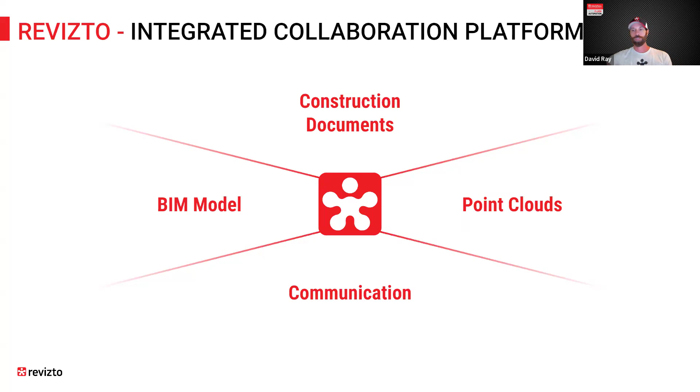And then, yeah, I guess one of my favorite things about Revizto, it does a really awesome job at bringing together the construction documents, the BIM model. If you do need to contend with existing conditions, so scan files and point clouds, it brings all those together. And then the one at the bottom, I think most important, communication. So being able to view the BIM model, view the construction documents, both handles it in a really unique way, and we'll go through that today. But being able to communicate around all of that data, I think is Revizto's strong suit, if you will.

And then some of the workflows that we cater towards, so to the right, design, construction, facilities management, right? And those aren't segregated, right? We kind of bundle those up, and we can have designers and general contractors, and then eventually the FM teams, all in that single collaboration platform. And then again, it brings the project data together, I think, in a really meaningful manner.

So the graphical data, 2D, 3D, comes together in Revizto. If you do need a common data environment, it does that as well. And then the issue tracker is kind of set up to be viewed on an issue-by-issue basis, but if you need to reach in and gather analytics on a more holistic manner, we can pull together charts and dashboards and extract issues and clash reports if you do need to generate any type of external report, for example.

Accessibility, super versatile software. I'll say it again just because, right?

So an immersive cave, we can set Revizto up to be viewed in kind of an igloo VR environment, if you will. Fully functional on a workstation or laptop.

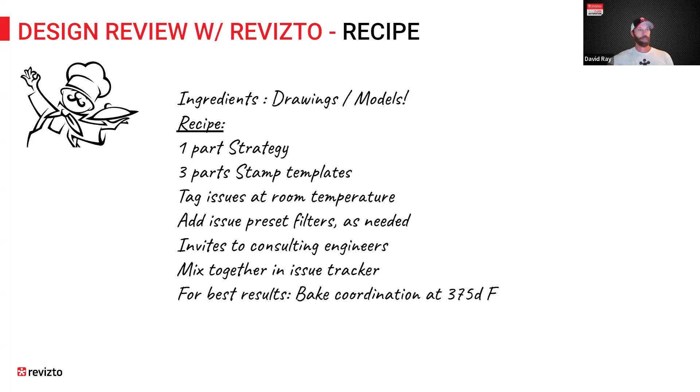All right, so I'll go through just some core concepts as it relates to the issue tracker. So issue fundamentals, right? So issues could be, as it relates to Revizto, clashes. They could be just general review comments as you're interrogating the 3D model.

But issues could also be markups, right, from a 2D review standpoint. So we'll take a look at the different ways to use those.

Filtering, right? I mentioned the different ways we use issues. So pretty critical to be able to filter for those in the issue tracker and get to a pointed list of markups or comments that you need to address or review.

And then the chat window - so that's another pretty instrumental, or core, aspect of the issue tracker. So being able to mark something up, but then get a dialogue back and forth and hopefully arrive at a good design decision.

So some takeaways for today. We'll look at some efficient ways to identify mistakes and risk areas with Revizto issues. We'll go in - that'll be a pretty in-depth part of this conversation.

And then look a little bit deeper into maybe some QA/QC strategies as it relates to that workflow. And then we'll take an even deeper dive as it relates to some of the tools we have for reviewers. And one of my favorite use cases is how to set Revizto up on maybe a phase-based review.

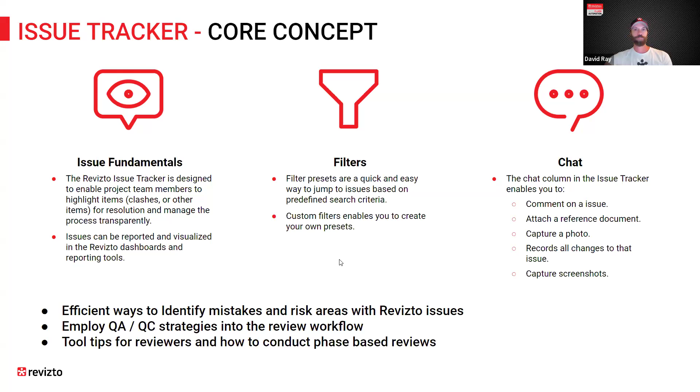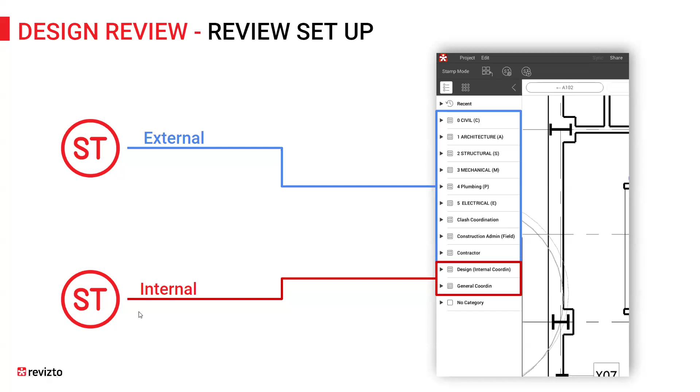So some of the issue tracker setup aspects, we typically see stamps used as part of those review efforts. Stamps can be pretty versatile in Revizto. You can use them for clash detection, and also for marking up sheets. The two main ways I see the issue tracker set up or stamps templated: from an external standpoint, if you're marking up drawing sets during design development or construction documenting, you might want the stamps pointed more external to your team. If you're bringing consulting engineers into the cloud-hosted Revizto environment, it makes sense to set this up so we can assign issues out to structural, mechanical, electrical, etc., but also internally to coordinate with our team. Those are the two main ways I see the setup unfold.

My philosophy with stamps is to keep these as simple as you can. I've seen projects where, after some lessons learned, they tried to capture every MasterFormat spec number in their stamp templates, and it just gets a little unwieldy. So I always recommend keeping stamps simple.

These are very user-defined, if you're making comments to a project manager, project architect, or designer. Then you can utilize tags as a subcategory to filter for. Maybe it's just how my brain works, or because I come from architecture, but on a phase basis, if you need a tool to go through a review and capture everything in schematic design, design development, or construction documenting, the tags become that subcategory to filter for outside of the stamp.

So we can set up one stamp, comments to project manager, just make it super simple, and utilize tags for that subcategory to filter for. When we get into the issue tracker, I'll show more on the filtering mechanisms and how that's instrumental as part of the review process.

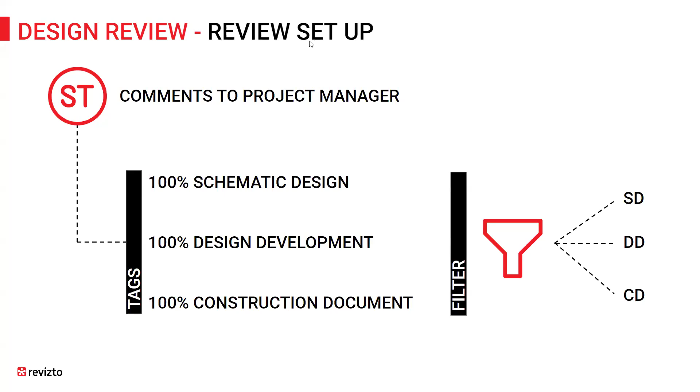Kind of more on tags: as we set up our stamps, I'll use my internal coordination example here—comments to the designer on the project. That's where I would put in my milestone tag, so I'd be able to filter the issue tracker based on those various phases that come up. So these are very templatable attributes. This is where I'm templating into my stamps the issue types, the assignee, making sure it's going to the correct person, priority, deadline, and then the customizable aspect here would be the tag.

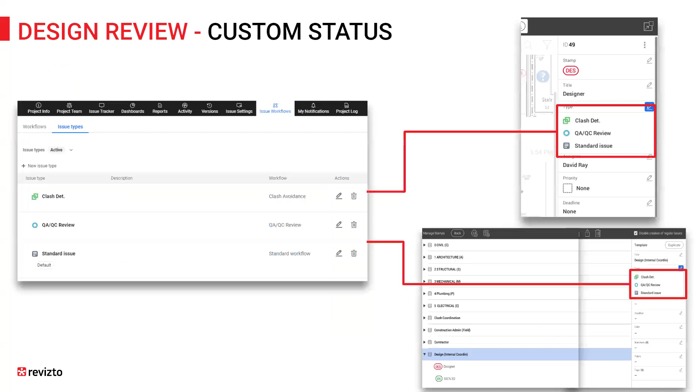Something else I wanted to touch on as it relates to design review: custom statuses in Revizto, which is something newer as of the 5.14 release. We can develop various issue workflows, and it shows the versatility and variety of reviews we can conduct when using Revizto. These are intended to be set up and curated to each workflow.

The screen over here is the web workspace. If we set it up within the web, it makes it really easy to push that into the various projects we're working on. A couple examples I put together here: you might have one that's more specific to clash detection if you need to run clash on your project, and then a QA/QC review, which I'll use as an example as we go through things.

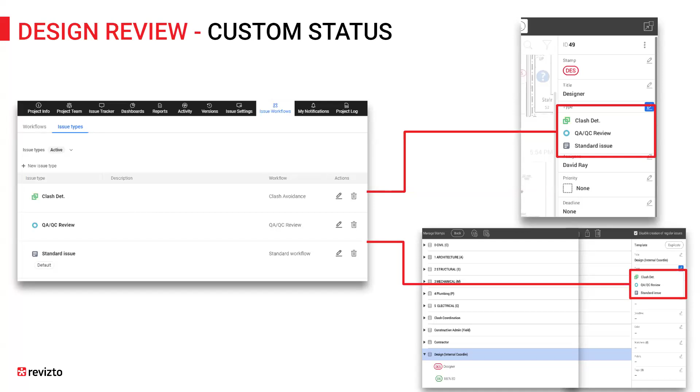So, organizing markups as it relates to design review. As previously mentioned, we might have clash issues coming into the issue tracker. We might have generic issue pins that come in, and we might have a variety of stamps feeding into the issue tracker.

So with a little bit of strategy on the front end, we mentioned stamps, tags, etc. You can organize this from a markup standpoint as well, and I'll show that as we go on. This can get pretty unwieldy pretty quick. I've seen the issue list on some projects go into the thousands. So being able to filter this down, not only from an issue standpoint, but also controlling what markups I'm seeing on the drawings as well.

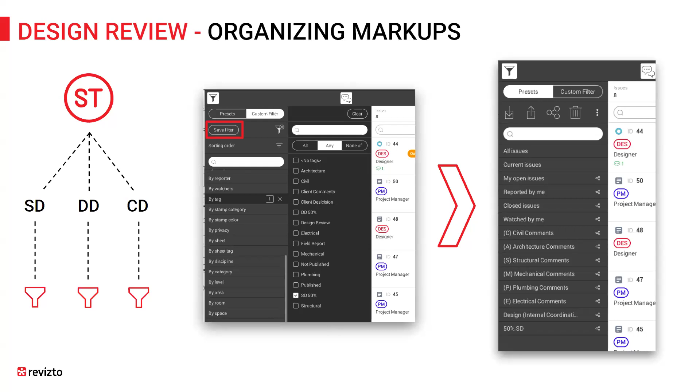All right, so next we'll talk about some of the tools and features, and this will be part of the deeper dive portion of the webinar here. Some of this I kind of mentioned at the beginning. Some are pretty obvious, and I don't mean to bore you guys, but some I think the way we set them up may be a little bit lesser known. So hopefully some of these tools will help you guys out if you did want to use Revizto for design review.

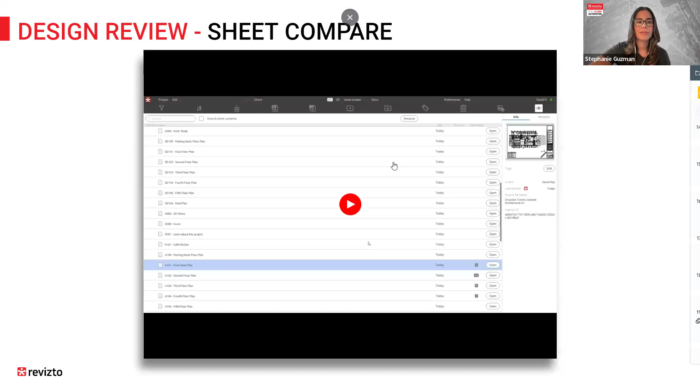Uh-oh. No worries, David. Maybe it'll be better if you can stop sharing your screen and share the screen from your other monitor. Sorry guys, we have a little bit of technical difficulties. Yeah, that's strange, let me try that. Oh, there we go, nice. Okay cool, sorry about that everyone.

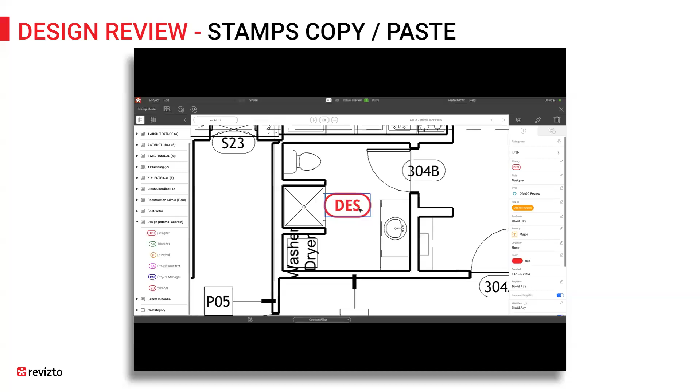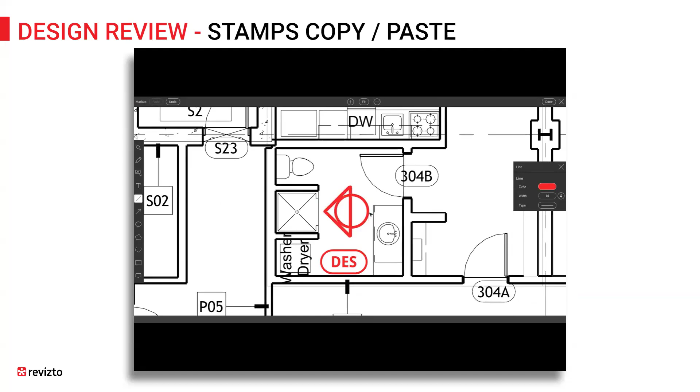So stamps, copy and paste. Sounds super simple, but I think our development team did a really good job of making this a super functional tool. I'll show a quick example here where, maybe in a washroom space, I drop a stamp, grab my annotation tools. The comment here is maybe I need an interior elevation here at this restroom space. So I draw my call out markup, that's going to go over to my designer on the project. Once I complete that, I'll go up and hit done.

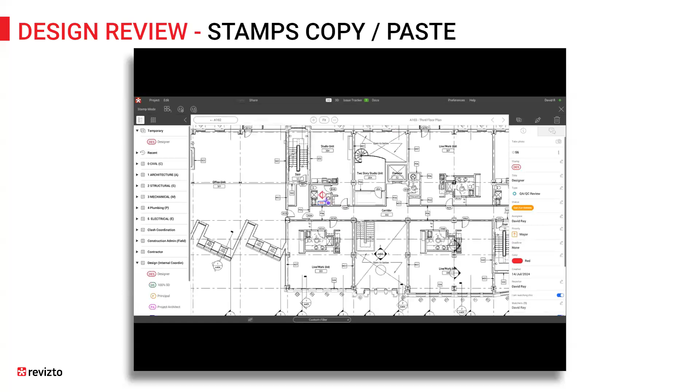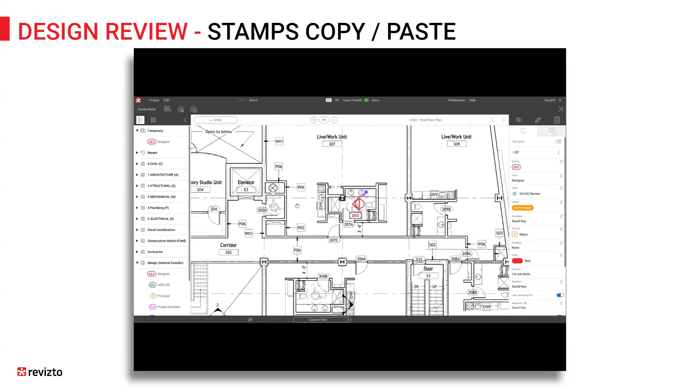Back at the top of my stamp template tools, there's a temporary stamp feature. You'll notice up there at the top it puts it into its own category, and that makes it so I can drop another stamp and the annotations come with it. So I'm going to move my stamp out of the way, adjust where my elevation call out is, and then I can keep going. If I need an interior elevation here at this kitchenette, I can drop that in.

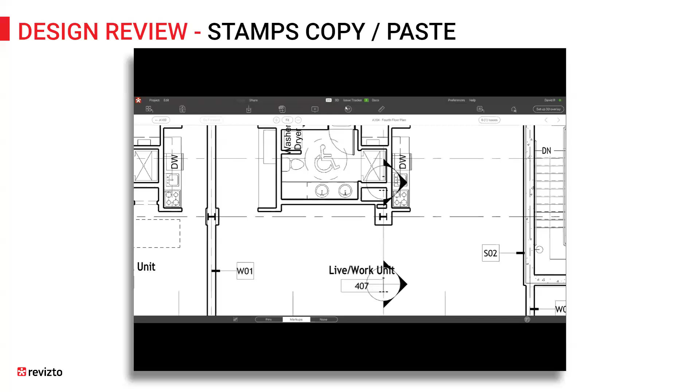So pretty versatile in the sense that not only can I do that on this sheet, but I can go back out to my sheet gallery, for instance, and switch up my drawing set. Maybe I notice on my other floor plan here we do need some elevation references, so I can grab my temporary stamp again, place that on the sheet, and that's going to bring the call out with it.

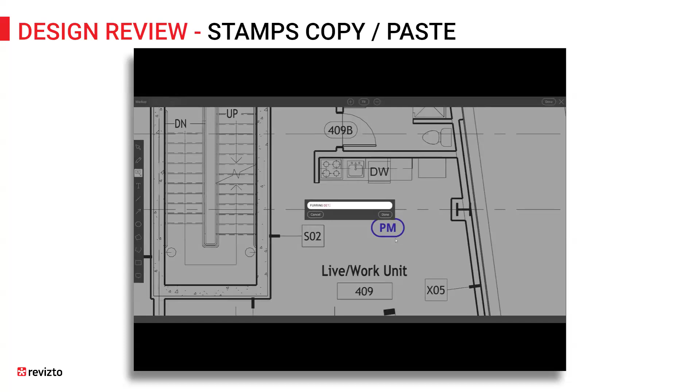The other way we've done this is if I, for example, have a comment for my project manager. So I grab that stamp, place it here on the sheet, grab my annotation tools, just a quick example of a markup. Grab a call out, I'm going to say maybe we need furring detail here. I'll hit done, grab another, some more line work here, grab the rectangle tool, make sure I'm specifically calling that out where we need that detail added.

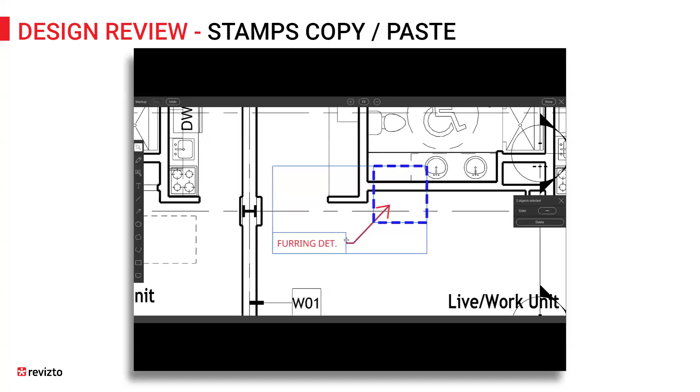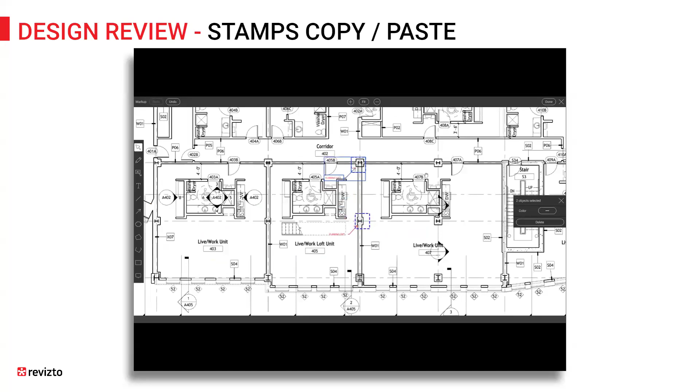With a Control C, Control V, I can grab that line work. Before I did that, I held Control and was able to copy all of that. Then with Control C, Control V, I can drop that into my next column. My leader gave me a little trouble there, but I can keep going - Control V that again, Control V one more time. Hopefully that helps you guys out if you currently use Revizto for design review, just being a little more efficient with your day-to-day.

All right, so next one we'll talk about sheet compare. This one maybe is a little more on the obvious side, but the thing I want to point out is that not only can we compare past versions of drawing iterations as new versions come into Revizto, the drawing set updates, and then we can utilize the compare feature to see where those changes have occurred.

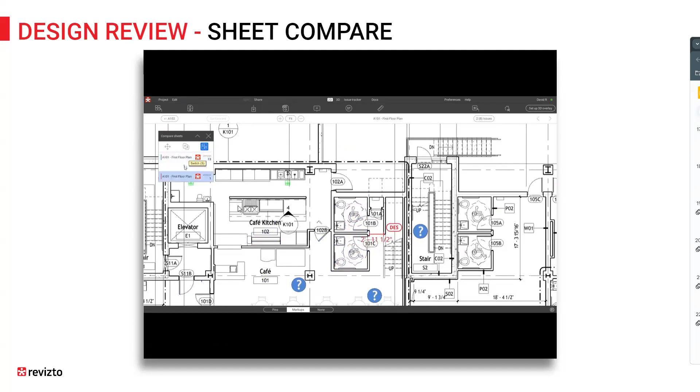As part of a design review process, you want to make sure things are corrected as you go through. So there's a slider bar for compare. You can have each sheet active and flip between the two, not only on a single sheet with past versions, but also if I wanted to compare a third floor to a fourth floor, or other discipline drawings, you could compare architecture to structural or mechanical, and keep going that way.

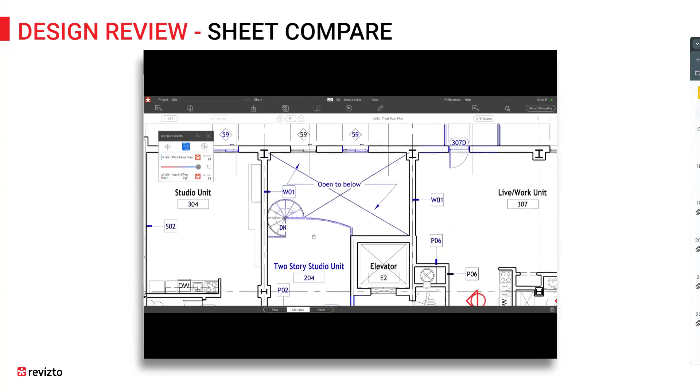So what I really like about this tool is with the compare activated, keep in mind your issue tools are going to work with it. So I can go back into my slider, grab my stamp tool, and maybe I need my designer to take another look at something. So I can grab my stamp and mark it up.

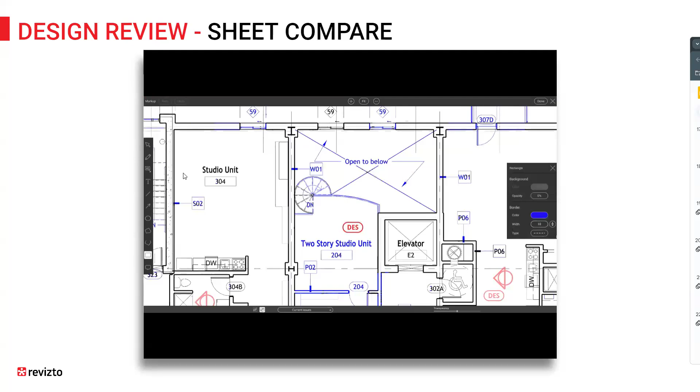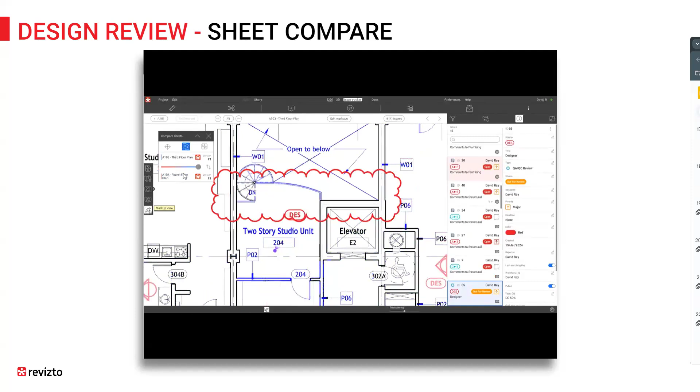I think I used a revision cloud here. So I go in, add my annotation, hit done. And then I'll go into the issue tracker and show that the person on the receiving end of that markup is going to automatically have this compare feature activated. So they can see the comment made and use the compare feature to verify things. Hopefully that adds a little bit of efficiency for you guys.

Sorry, everyone. I think I have this open on two screens, so it's giving me trouble here.

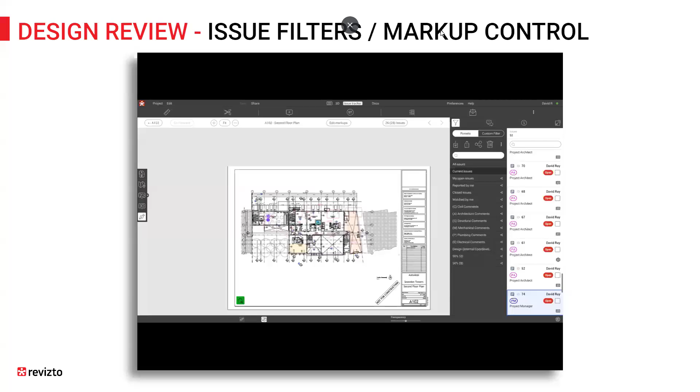Okay, issue filters and markup control. This one I personally love about the issue tracker. It relates back to the beginning of the presentation where I talked about utilizing tags and stamps to control the markup visibility in the issue tracker. So we'll look at how to go in.

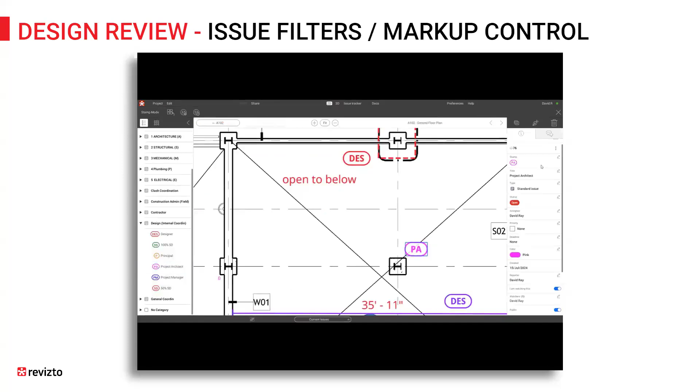In this example, I wanted to share that tags can be applied at that category level. So the internal comments I'm making, if I switch from schematic design to design development, any stamp within that category is going to carry that tag. That way, when I go through my drawing review, maybe I'm making comments to my project manager, and apparently I love marking up columns. I'm going to do that one more time.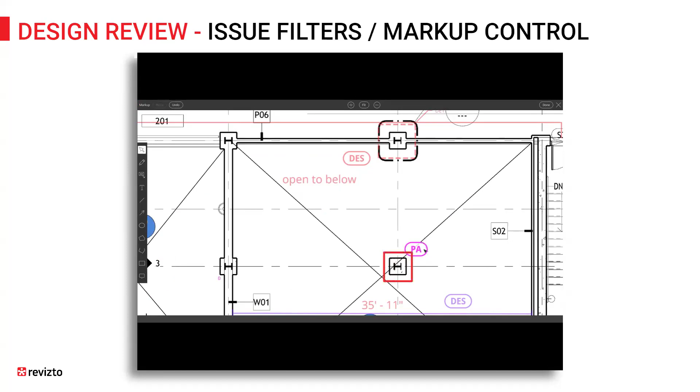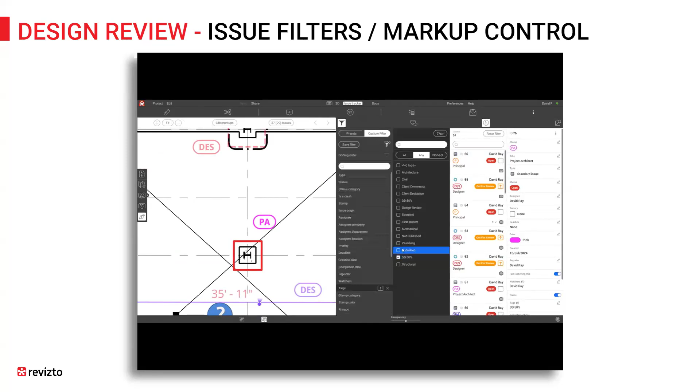Awesome. So here I think is a really good example of how maybe I made some markups for schematic design, moved on to design development, and I can pretty clearly filter for each one of those reviews. Revizto is intended to be this one session environment that's continuously updated as the project progresses. So we sort of want a way to filter out past markups. We always want a way to go back to those, but as we move on to the next phase, we want to kind of control those.

So you can see if I filter for schematic design, switch over to design development, you'll see the markups start to change. There's also a transparency slider at the bottom, I wanted to point that out. That gives you a clear indication of which issue you're viewing in the project. But if I go back to the issue tracker, back to my schematic design phase, you'll see the markups adjust and change as I go on.

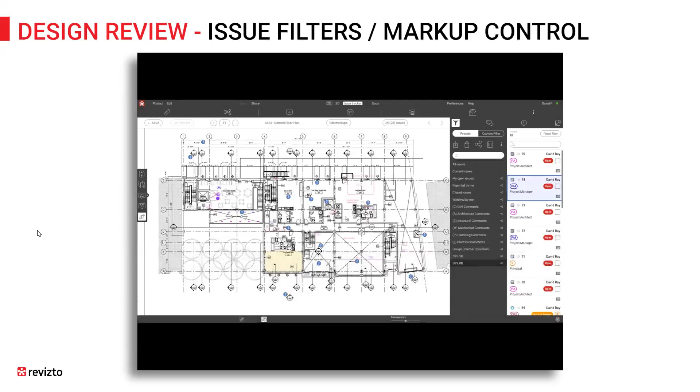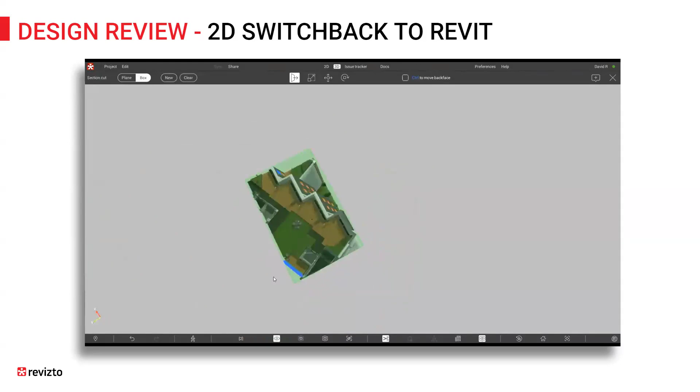Okay, switch back to Revit. I'm going to use Revit in this example, but just know conceptually we're a plugin to various authoring softwares. So I'll show this in two ways. I think we're all familiar with the switchback to Revit from a 3D standpoint. So I'm going to generate a section box here, use this as my switchback example. The plugin to Revit allows you to talk to the Revizto model. So right from the 3D environment, it can switch back to Revit.

Excuse me, it's going to open up a Revizto isometric view. The intent there is to go through clash resolution in a project. So the clashes are going to automatically section off for you. You can go right from the issue tracker 3D back into Revit, make some adjustments, and get the model ready for its next update.

I think one of the lesser known or lesser used features is the 2D switchback.

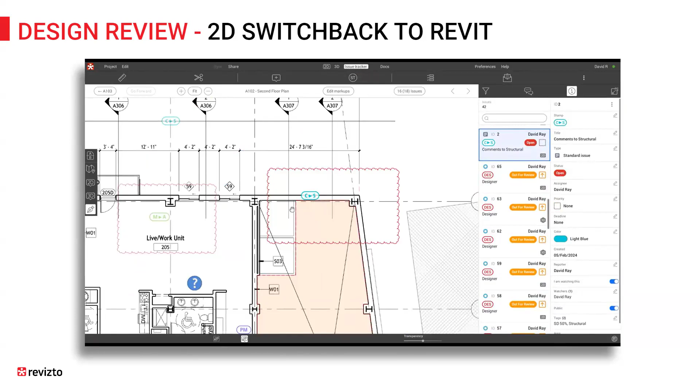But I'll find an issue here. It's a 2D originated comment that I made, and I can utilize the switchback from a 2D standpoint as well. It really just opens up the sheet for me in Revit as I apply that switchback.

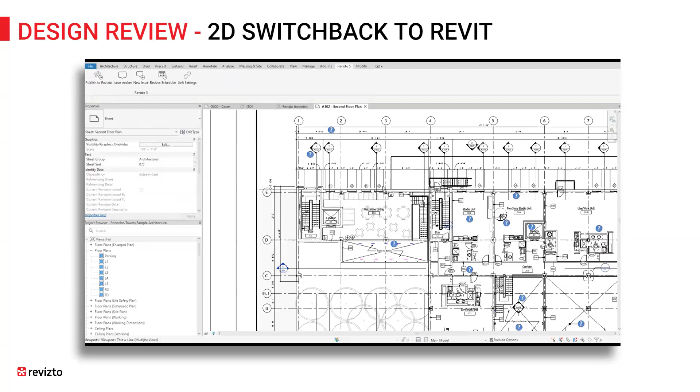So what I did in the issue tracker is double click on that issue. If it's a really large project, sometimes the browser organization in Revit gets a little bit unwieldy, so hopefully that helps you guys out. And then that is bi-directional, I wanted to point that out as well.

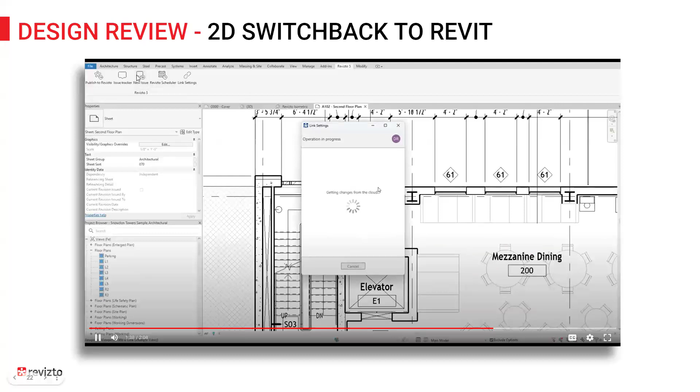It's something in the plugin, so we can go right from Revit into Revizto with the new issue button. Let me back up, but this button here, I can generate a new issue from Revit, grab my stamp in Revizto, place it on that problematic or conflicting area, and then generate a markup that way as well.

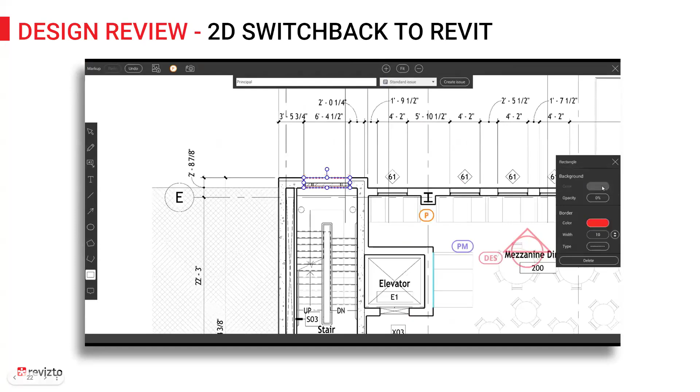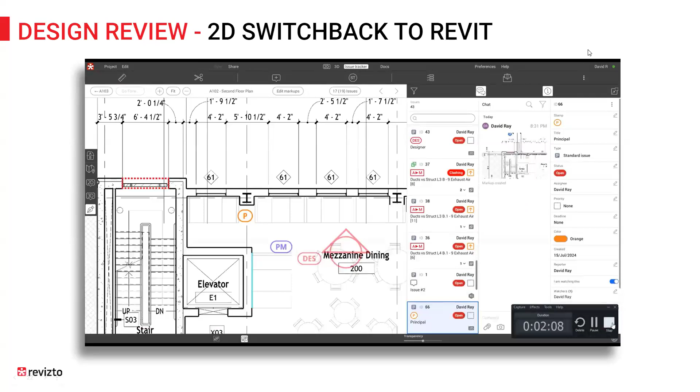Okay, next one is slip sheeting. In my opinion, this feature in Revizto is really unmatched and super powerful as it relates to design review.

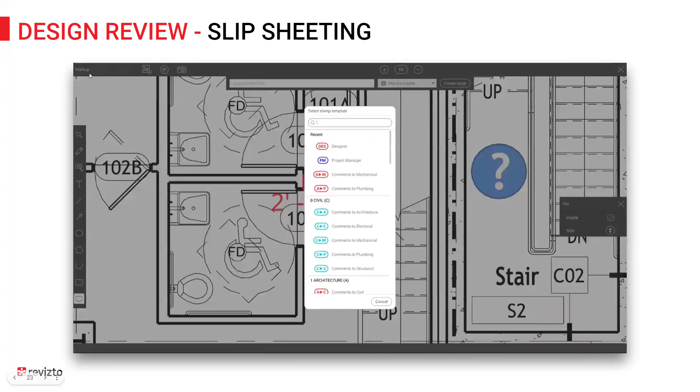In this example, I'm going to show just really quick how to generate a dimension. So I noticed that maybe we have some accessible restrooms in this project, and we have to comply with certain clearances in that aspect of design. So I place a stamp, dimension that out, created a dimension-based issue that's assigned out to my designer.

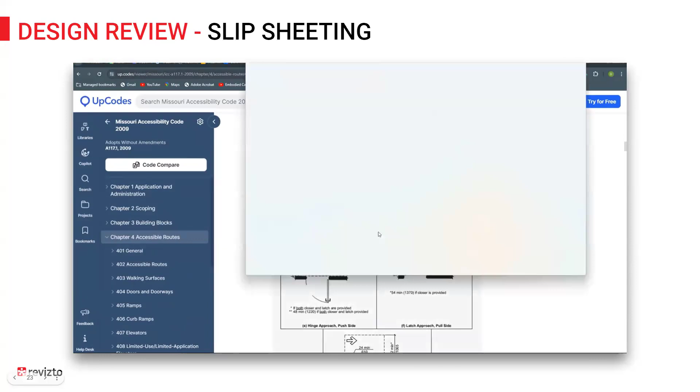Another thing I wanted to share here, if I need to reference something out of maybe ANSI 117, the issue tracker also accepts screenshots. So I can pull open my screenshot tool, grab a screenshot. I think I actually made a mistake here - we needed hinge approach push side. So I go ahead and do a new screenshot really quick.

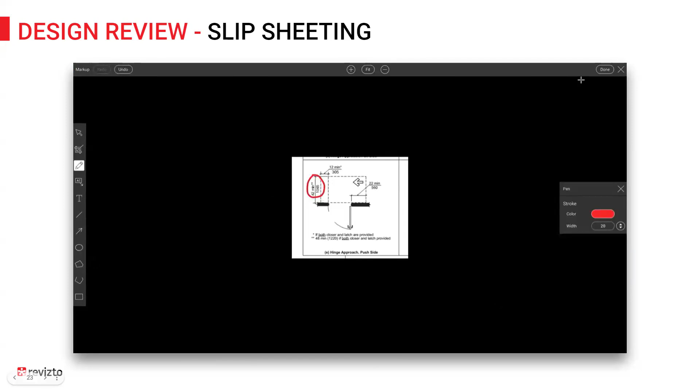And then right into my issue chat, I can copy and go back into Revizto, and I can Control V that right into the comment field. It's pretty nice, it takes me right into my annotation tools. I can grab my pen and say, let's double check that corridor width for that 42-inch minimum distance there. So I paste that in.

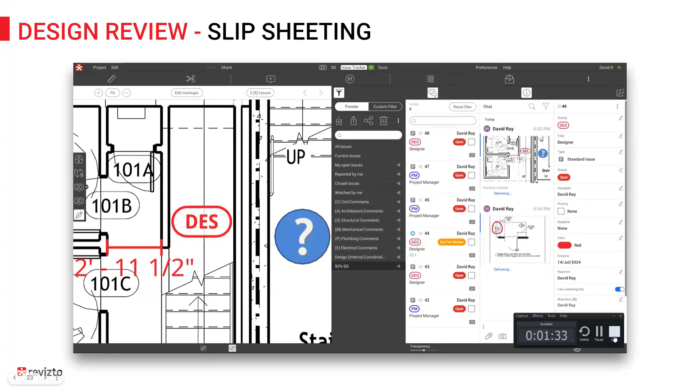So not only does my designer receive a comment with a dimension, but also a markup with a screenshot that references that code requirement we may need to adhere with. So from there, this is where the slip sheeting, I think, is super powerful.

So I can go back into the plugin, update. I'm going to update just that drawing just to kind of show this feature. I publish that sheet into Revizto, and it's going to slip sheet the new drawing, the newly revised drawing, into the 2D workspace.

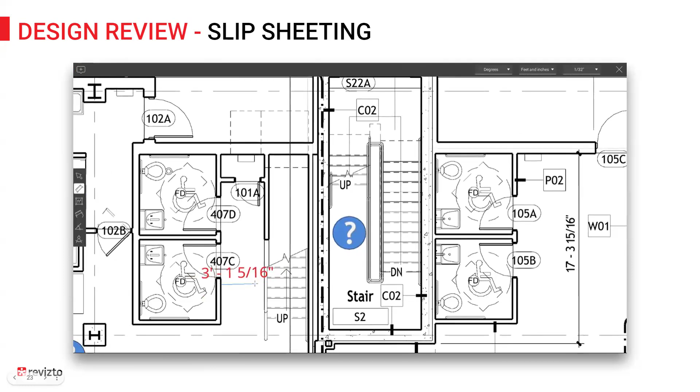And we can see I made some adjustments there. The markup stays exactly where I originated it at, and then we can see the updated line work come through. So on the maybe QA/QC person end, he can go back in if you need to back check that and just double check our dimension there and say, okay, yeah, we were over our 42-inch minimum. Let's get that ready for a QA/QC check.

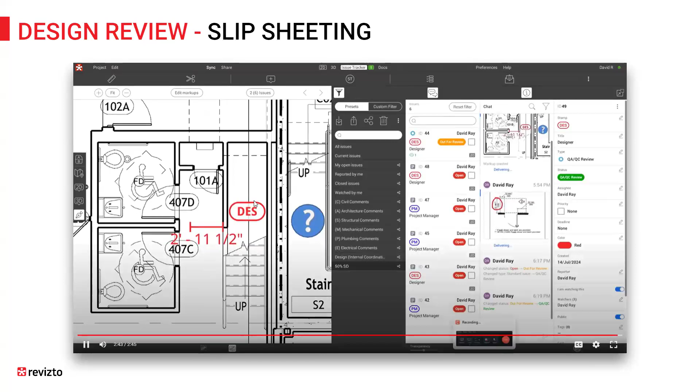Awesome, so yeah, a little bit on slip sheeting.

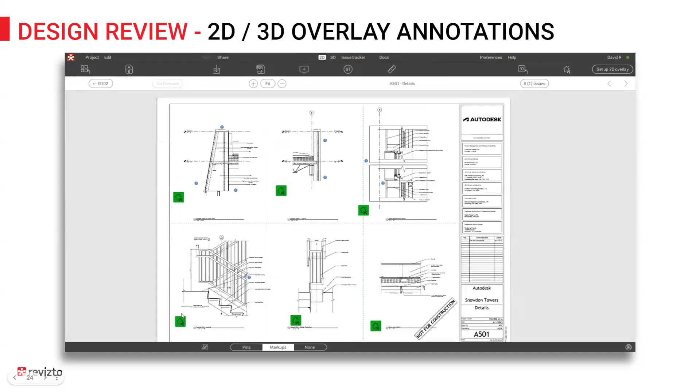2D, 3D overlay annotations - this is another one I think pretty awesome that Revizto does. So just from a sense of how it handles the 2D to 3D and vice versa, any stamp I'm placing, I can sort of visualize that from 2D to 3D, from 3D to 2D. And this is just a quick example of how I can utilize the overlay to go from 2D into the 3D, and then also apply a markup.

As we visualize that, I think this is one, a couple webinars, if you guys watched the one with Rossetti, Dan Wells pointed this out. He really likes to use this in client meetings, and it makes a lot of sense.

I mean, us as designers, we're so used to looking at drawings all day long, we produce drawings. But not everybody is super comfortable looking at 2D line work and knowing what that's going to look like in 3D. So if we have this pulled open in a meeting, or even if it makes sense just to mark something up, it very clearly communicates that to the person on the receiving end of that issue.

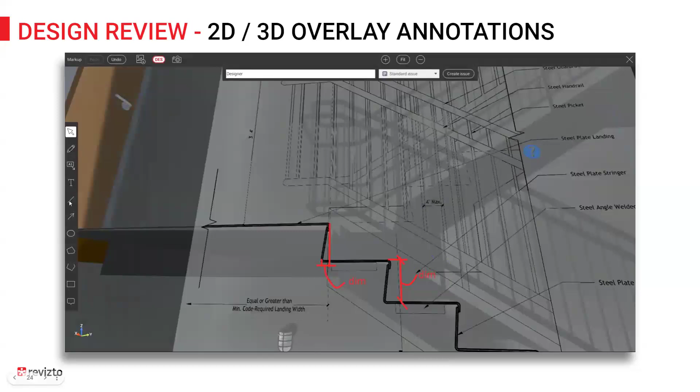So I'll just show a couple of - this might be a bad example, I probably could have communicated this just as easy on a sheet. However, yeah, just wanted to throw this out as an example. So kind of dimensioning out, again, code requirements for stairs - we might need a nosing maximum dimension, rise and run as well. So we'll go ahead and mark those up.

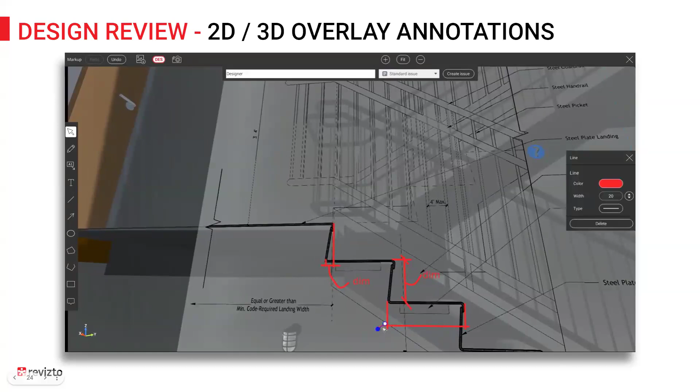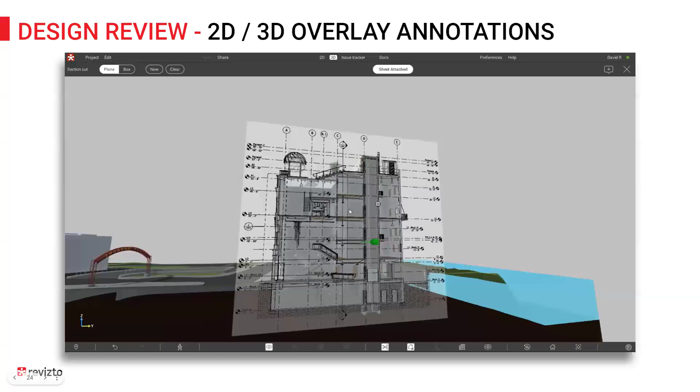So I'll generate my issue from there. I wanted to show one last example - any live view from Revit into Revizto will carry that overlay functionality. So if I'm in a scenario talking to an owner who needs more context behind just the line work, I can overlay a section, utilize my section cut tool, and that really clearly tells the story as we go through the conversation.

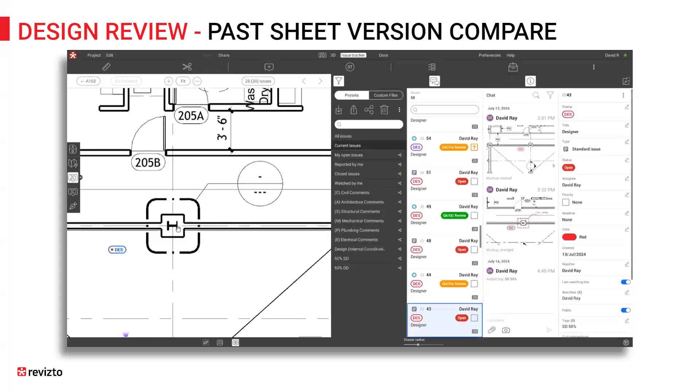Okay, past sheet version compare - this is one in Revizto, pretty powerful. Say, for example, I update the drawing set 30 times in Revizto, and maybe I'm not using the sheet compare at every markup. So I can see what that looks like in 2D, and in the issue tracker I can see where that issue pin resides in 3D. The version history here, this is kind of a sandbox example project, but sometimes that will grow pretty lengthy - we see 50 versions in there.

So the AB icon allows me to apply a sheet compare specific to when that markup was generated. I can see from version 1 to the latest version what that looked like originally when I created the markup, and what it looks like now. It looks like I added my callout for a furring detail, and we can clearly see that in the issue tracker. So I think that's pretty helpful if you want to set up the issue tracker for that QA QC review.

I'll go back here briefly to my restroom example and show the same functionality, where we have a slider of what the drawing looked like when we marked it up, and what it looks like now. That's where we can end the life cycle of that markup or issue.

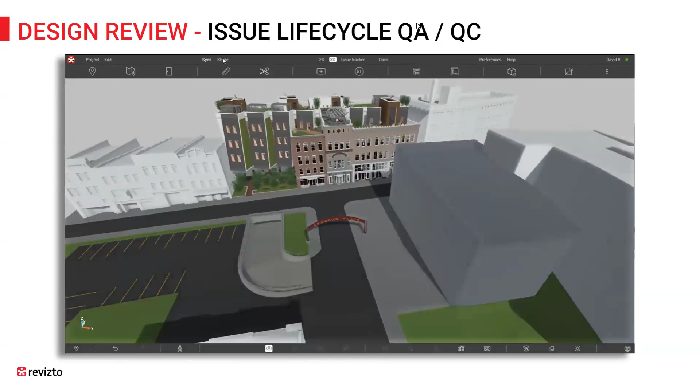Okay, looking closer at the QA QC setup, if you did want to use Revizto from a design review standpoint - everybody invited into the project has a permission level. We can be specific on who can close issues or mark those issues completed. So there's a permission setting specific to editing issue statuses except for completing, and we want to tick that on. I think I left it off in this example, but that's where we can go in and save this as a new role - maybe titled QA QC - with that permission level setting turned on.

Let me get through my example here. So, save as new role - I'm just going to cancel out of that. I just wanted to show where that setting existed. But that way in the issue tracker, you're probably instructing the team to mark everything open, in progress, all the way up to solved in a standard issue.

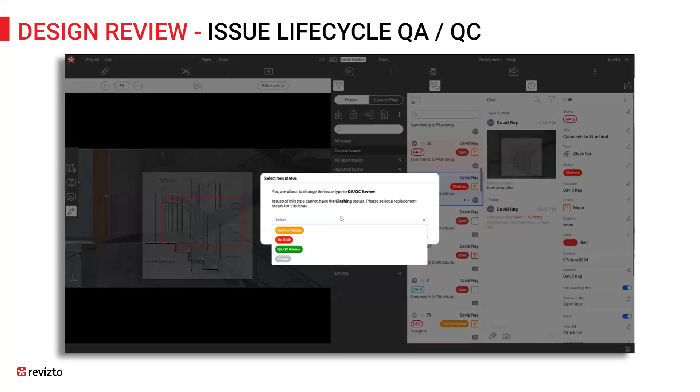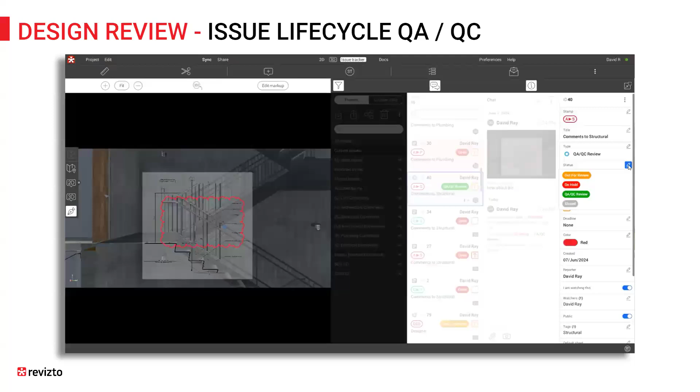The clash detection example - I just have clashing and closed here as a brief example. If I go into my QA QC review, that's where we can say okay, this is out for review, maybe we need to put it on hold, or eventually we'll see the drawings update and we want to mark those ready for QA QC review.

So that allows my reviewer to come into the issue tracker, maybe apply a filter specific to that status. We'll get into our statuses here and filter the issue tracker down - looks like 4 issues or markups are ready for that review. That gives them a really concise list to go back and say, okay, some of these issues are taken care of, or it can go the other way and you might need to start that review life cycle over once more.

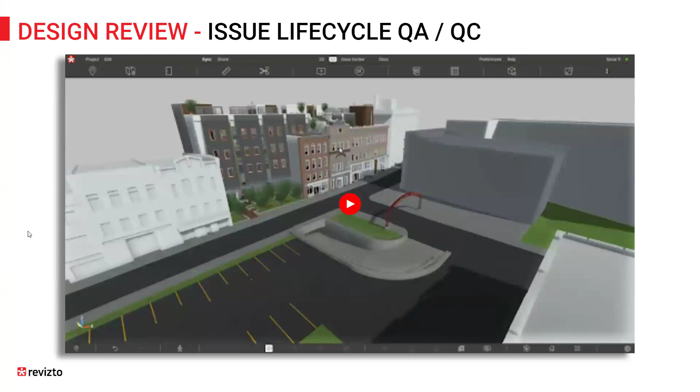Awesome, so yeah, I wanted to run through those tools more in depth than we normally would.

Next up, I'll do one 3D coordination view, just showing some view techniques. This one I get questions on quite often, I think it warrants a shout out in a webinar, and it's really specific to Revit phases. Maybe this is a residual from Revizto 4, where some of those phase-based views from Revit into Revizto came in automatically. I just wanted to show a quick example of how that can be set up in Revizto and how it can aid that design review process.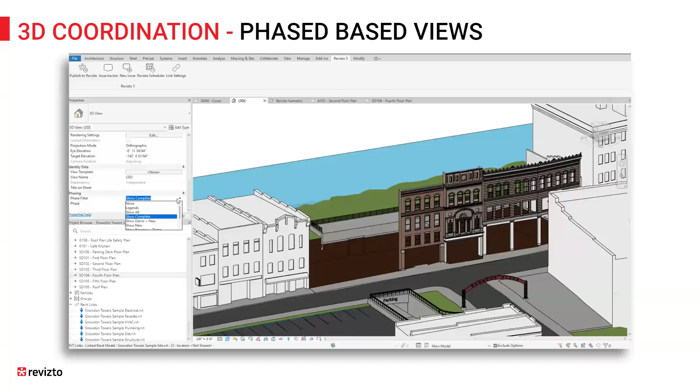Out of Revit, we have phase filters and phases. I typically set up a 3D view where I'm showing a phase filter of none, so I want everything to show. I'll switch that up here in a minute, but basically the intent is we're setting up the 3D view.

Basically what's visible in that view dictates what comes into Revizto. So we hit apply there, we basically want everything turned on. I typically recommend going to that last phase in Revit because they're sort of timeline based, right? One phase can't happen before the other.

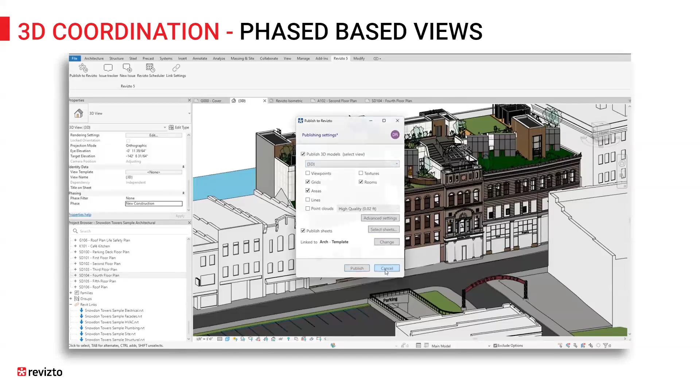I basically use the default 3D view after I set up my phases, publish that into Revizto. And then if I run a show all, I kind of have a home viewpoint set up where the existing conditions are hidden, but running a show all, we can see the existing conditions out of Revit came into Revizto, and that's where I can start to develop my 3D coordination view.

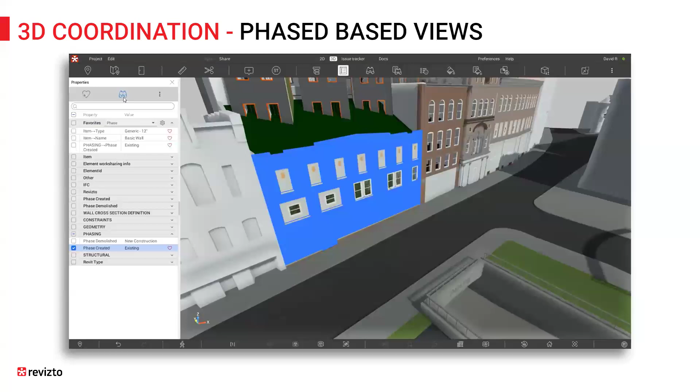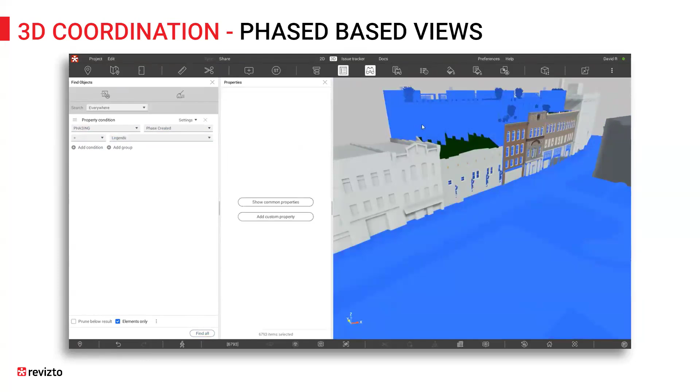So we can get into our parameters here, phase created, for example, find objects. And then we can go through the various phases that came in, run a find all, so we can look at what's new construction, what's existing construction, and again, legends happens to be a phase in that project.

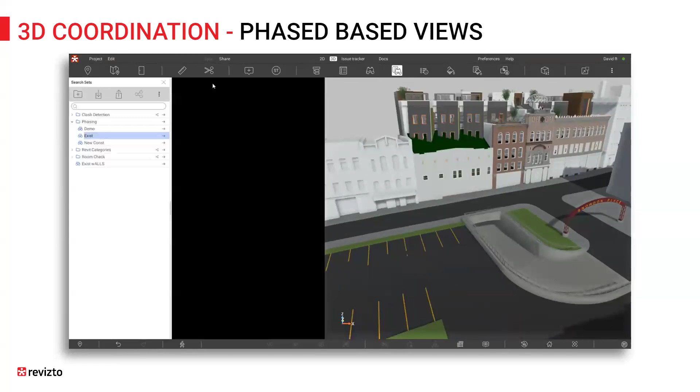So I can save all of those phases as separate search sets. Out of the find objects, I'm going to go into kind of a search set phasing folder example. And then with those set up, we can test our theory here. It looks like those are all working appropriately. And then from there, I can get into my appearance profiler, add a rule based on those search sets, and start to develop that 3D view.

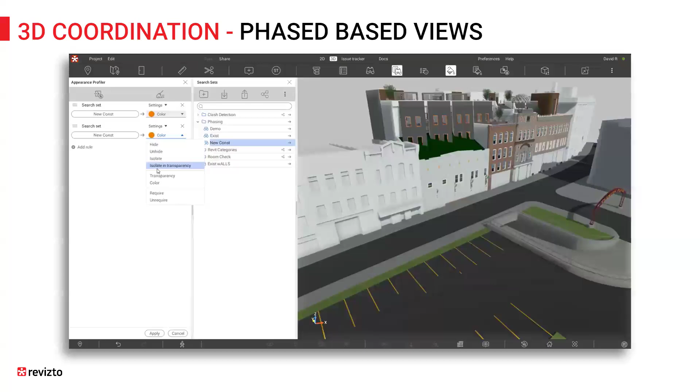So I'm going to do a kind of crazy example to start with, but we'll scale that back into something more realistic. So my new construction phase, I want to color that, and then set up a transparency level, hit apply.

And then if I add another rule based on my search set, we can start to layer in the existing phase, kind of the same thing, add a contrasting color. And then we'll go ahead and duplicate and add some transparency as well.

Hit apply, and then from there I can save that off as an appearance template. So we'll go back into the appearance profiler tool, save that off as a template, and then we'll look at how to utilize those for reviews.

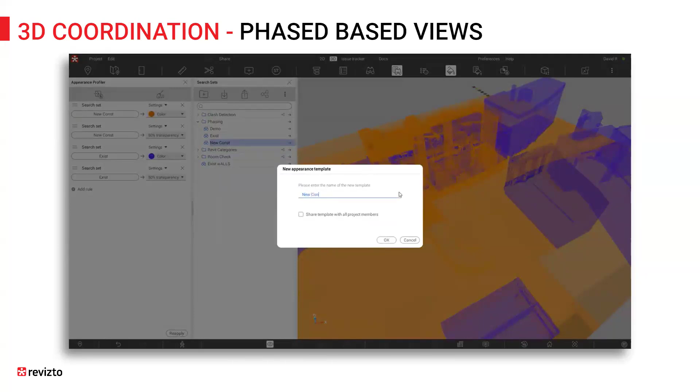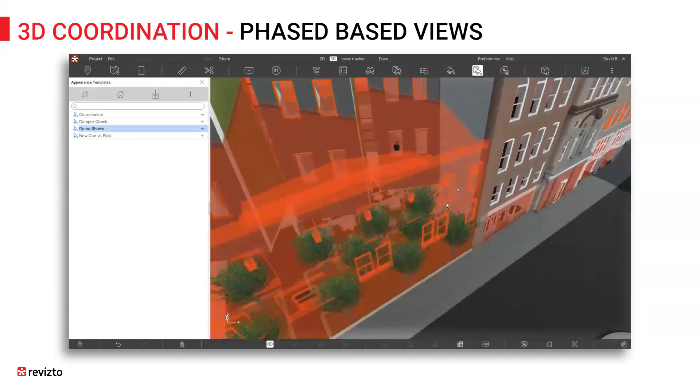Awesome. And then with that set up, I can basically go in and adjust my view as needed. This one's a little more realistic, where maybe we're showing the construction to be demoed in a red, transparent manner that makes a little more sense. I go a little bit further with this one.

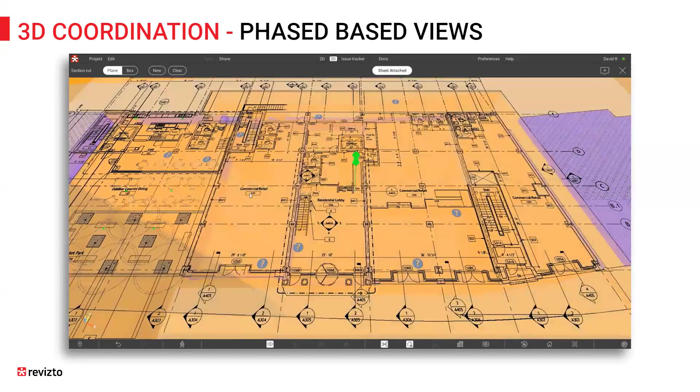I go back into 2D and show the overlay. And if we're reviewing drawing sets and looking at demo plans, I think this is pretty helpful if you need to verify what walls we're noting that need to be taken out, or maybe there's some things we need to detail as part of that demo work.

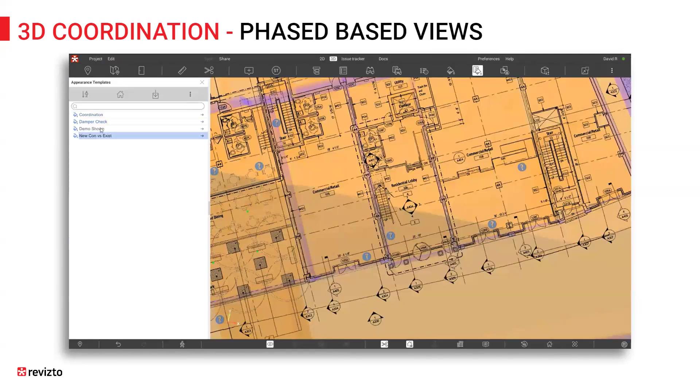And then I'll switch it over to the demo shown. I think this is maybe the better example, but we can pretty clearly see what construction we're removing, what needs to be added as new construction. And with that overlay, I think it's pretty powerful.